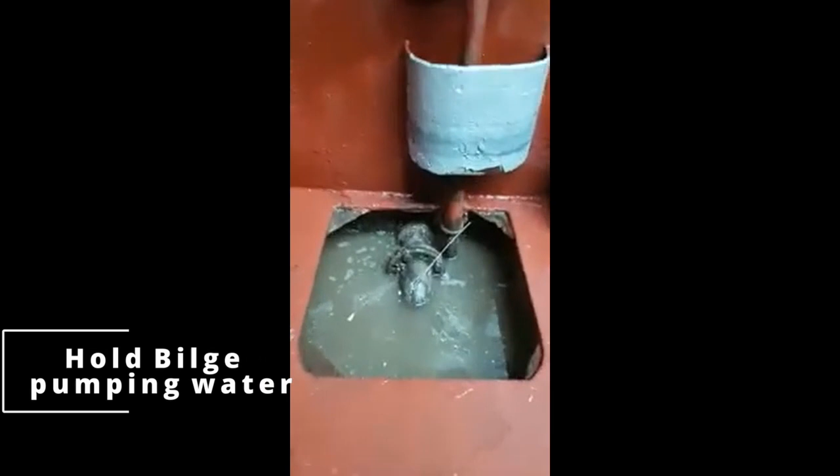So here comes the basic question. What is the function of cargo hold bilges? The only function of hold bilges is to gather all the drained water from the cargo that is loaded inside the cargo hold, and once the water is gathered, the hold bilge has the ability to pump out the water by stripping means.

Under what circumstances should you be using cargo hold bilges? First, to pump out wash water during the hold washing process, and second, to pump out water that is drained out while carrying cargo such as coal, sulfur, iron ore, etc.

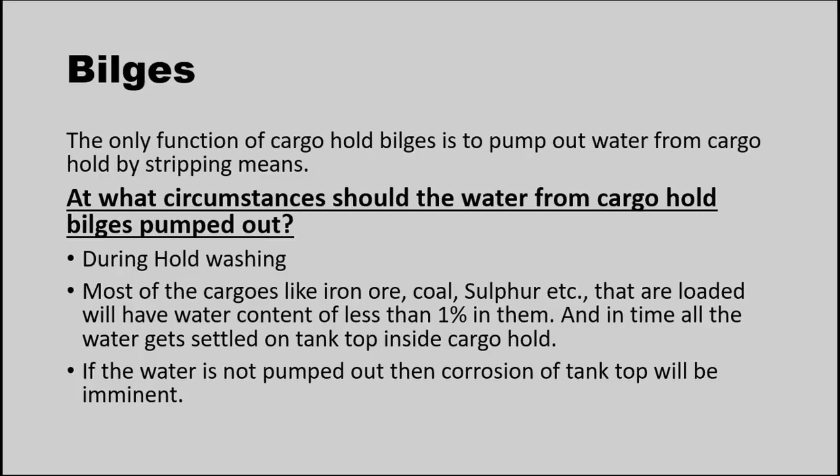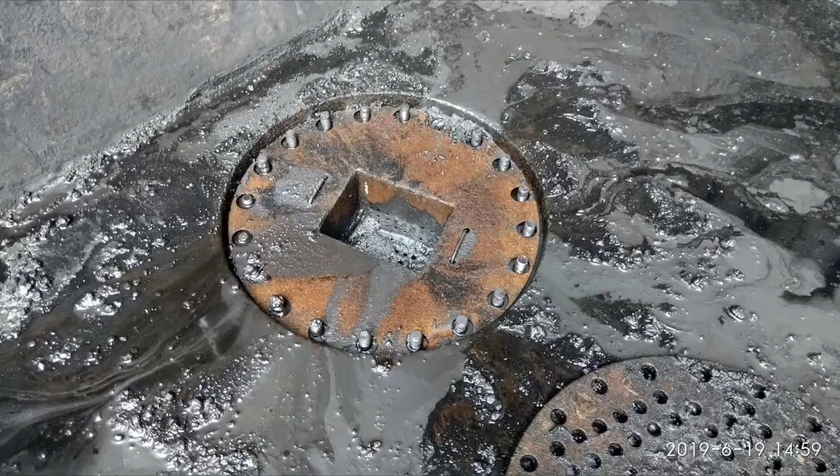So now let us discuss the structure of bilges. Bilges are nothing but a small compartment present in the aft of the cargo hold. They are located below the tank top. Bilges will be on both sides, port and starboard. These bilges will have a strainer plate. In these strainer plates, there will be some small perforations which help to drain water inside.

This strainer plate will be covered with a burlap prior to loading any cargo. Burlap is nothing but a jute bag. On top of the strainer plate, there will be a manhole cover. This manhole cover will not have any holes in it.

It is just a thick plate, and the purpose of this manhole cover is to protect the strainer plate from any damage which can occur due to the stress caused by the weight of the cargo or during cargo operations when they use payloaders. So in short, this manhole cover acts like a first line of defense for the strainer plate.

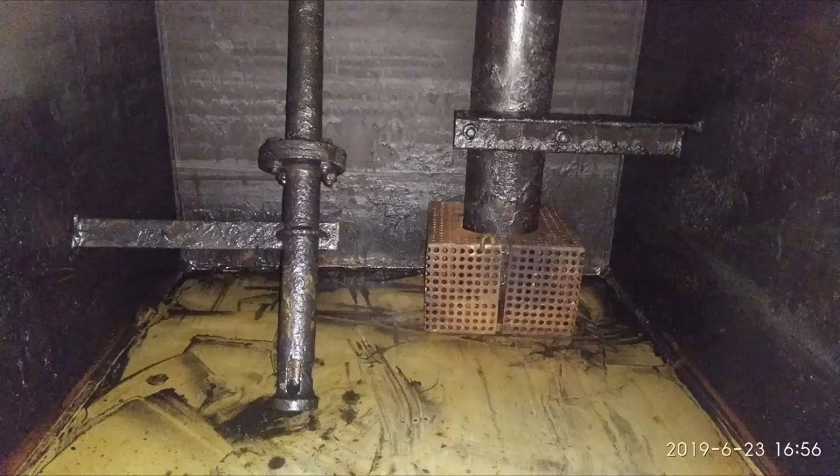Strum box. Strum box is also known as rose box. It is just a box which acts like a strainer. It prevents cargo residues from entering the bilge pipe. Each cargo hold bilge will have an individual sounding pipe. Through this sounding pipe, the water level of the bilge can be monitored. It is a standard practice to take soundings of these bilges daily.

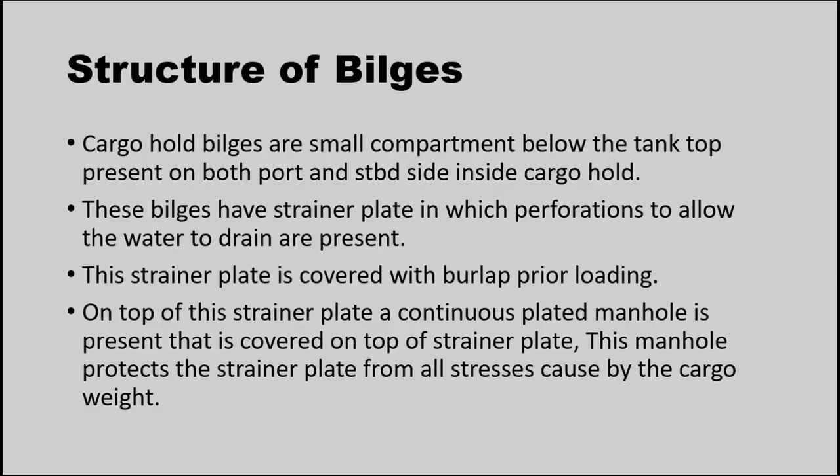Have you ever thought, what if suddenly the water level of the bilges starts to increase at night, causing the vessel to list towards a particular side? And obviously you can't tell a cadet to continuously monitor the bilge at night also. No, that's not possible. So that's why there are sensors fitted in the hold bilges.

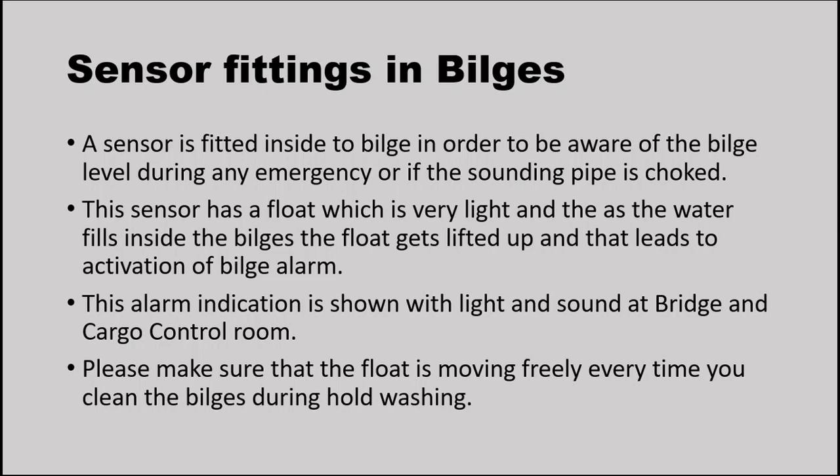These sensors will have a float which gets raised along with the water level inside the bilges. Once it is raised, an alarm will be sounded. This alarm indication will be shown as a flashing light and sound at the bridge and the cargo control room. So all these sensors come under the hold bilge monitoring system. Please make sure every time you grease the float and make sure that it is moving freely after sweeping of bilges.

How do bilges work? Cargo hold bilges pump out water from the hold using an eductor. I hope that you might have heard of an eductor. It is nothing but a system that can suck water by utilizing the Venturi effect.

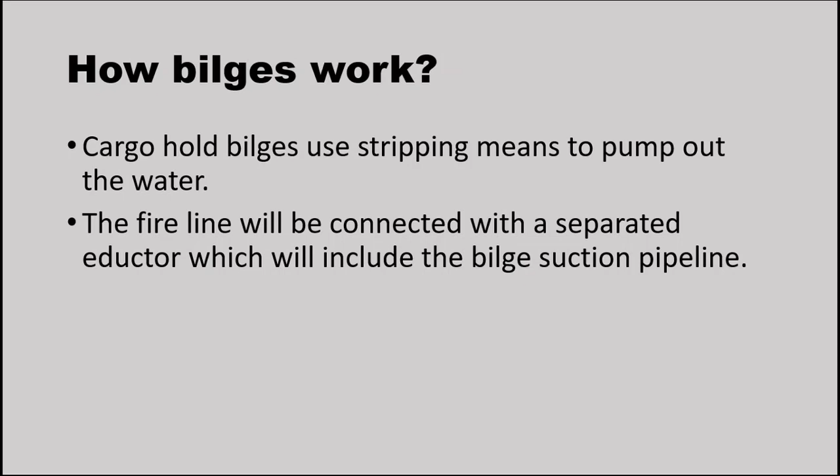Now comes the fun part. Many of you might have many questions about your cargo hold bilges, like how to increase the bilge suction pressure. If you partially close or throttle the anchor wash, then it will increase the fire line pressure, which automatically increases the bilge line pressure also. But keep in mind, it is not safe to completely close both the anchor washes. If you do so, always keep 1 or 2 fire hydrants on deck open.

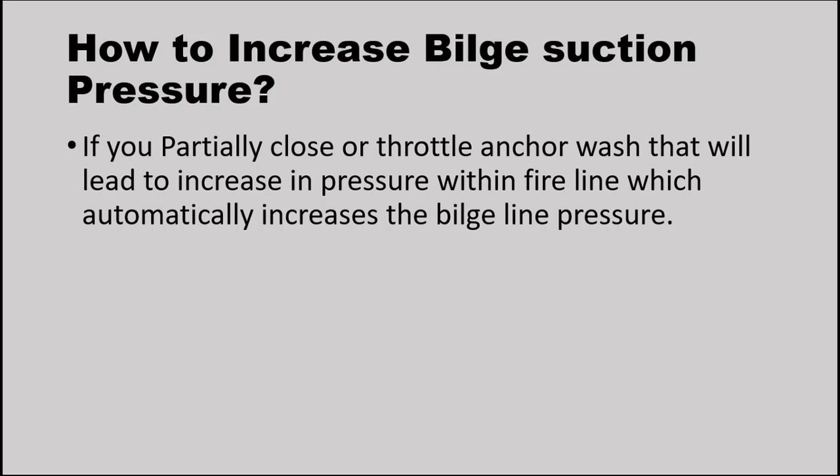If you completely close both the anchor washes and you did not open any fire hydrants, then the pressure in the fire line will be increased a lot. That might damage the fire line, causing it to crack at its weakest points.

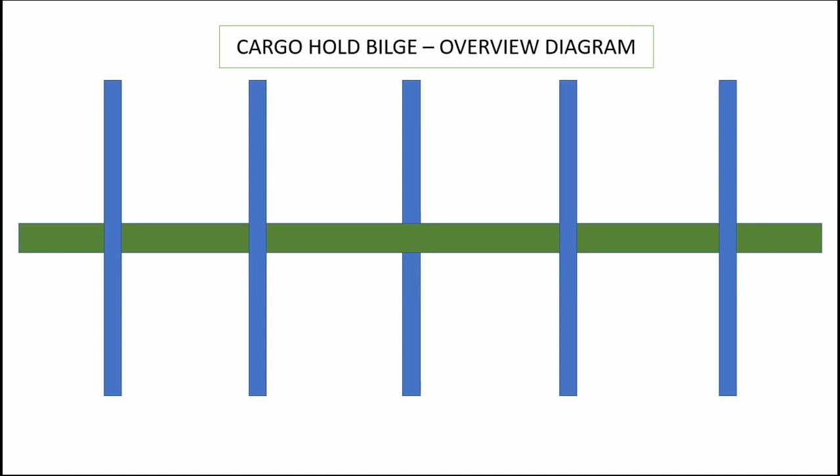Can we pump out cargo directly through the bilges instead of demucking and stuff? Because a lot of time will be saved if you do that. Trust me, it would be really easy if you do this, but if something chokes inside the bilge pipeline, then your entire bilge system will be screwed. Okay, now just think practically. Your bulk carrier vessel might be carrying a range of cargoes starting from ores, fertilizers to grain cargo, etc.

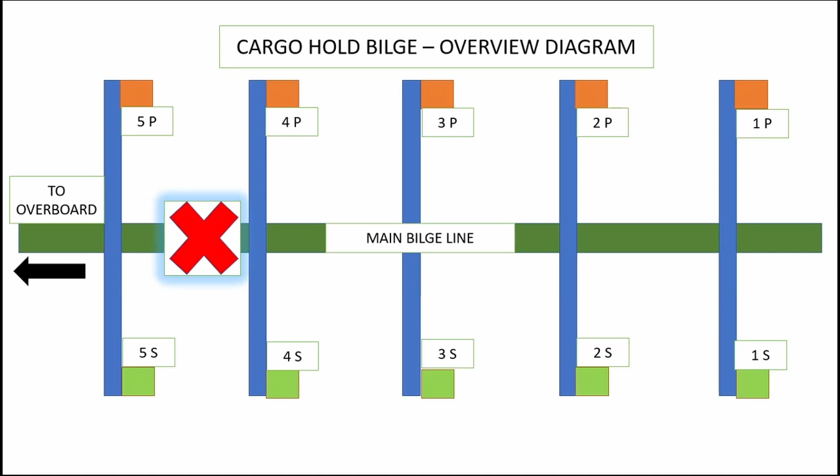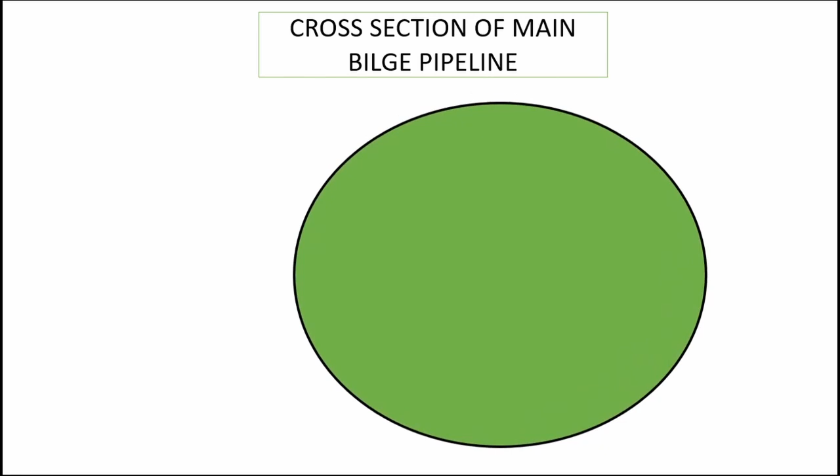So imagine first you are pumping grain cargo. Residues of grain cargo are present inside the pipeline now. On this, a layer of iron ore, which you will be pumping out next through the bilges, will also get settled in the pipeline. And later you will similarly pump out nickel ore, another layer. And a fourth layer, just imagine coal you are pumping out, so coal will also get settled. Just like that, again you will pump out cement, then cement will also get settled. So like this, layer after layer, they get settled inside the main bilge pipeline.

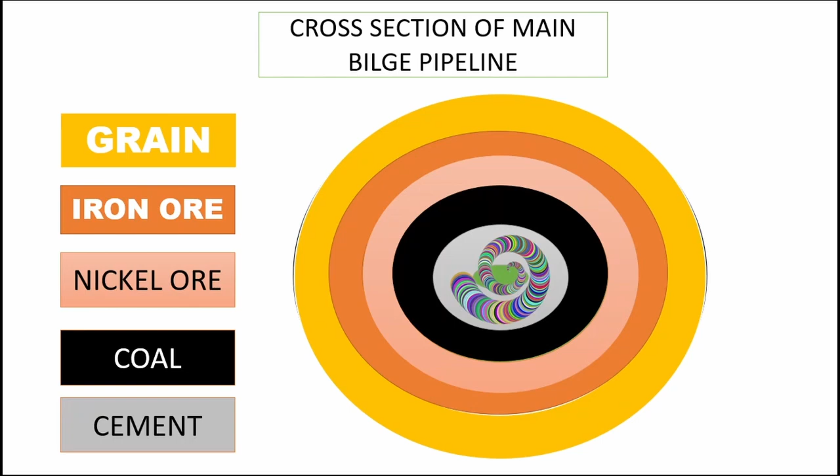And one fine day, when you again try to flush out the cargo through the hold bilges, the present cargo which you are trying to flush out will go and fill in the gap, and it will start choking the entire bilge pipeline. So if this choke happens, then your nightmare will start, because you must then clear the choke in the pipeline for the bilges to function properly. And these pipelines are present inside the duct keel, and you don't know the location of the choke either. So you must start removing the flanges of the bilge pipeline from one side, trying to clear the choke.

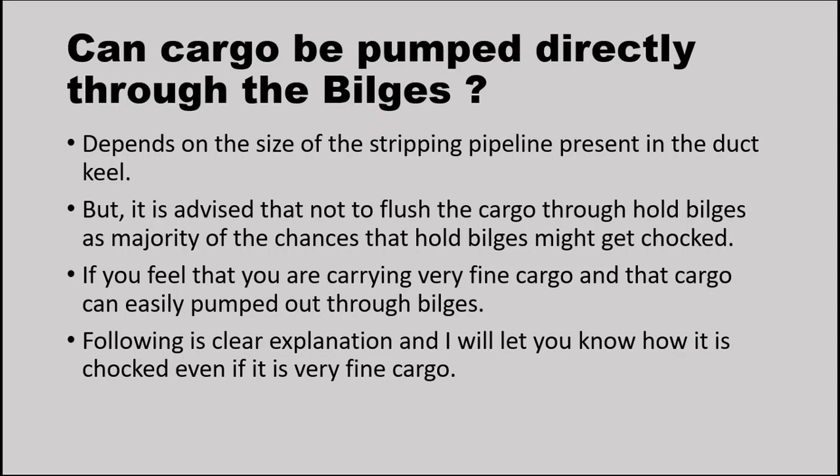Okay, now you might ask, what are the other alternatives instead of clearing the choke? Of course, for temporary purposes, you can pump out the bilge water or bilge cargo residues as much as possible through a Wilden pump or a submersible pump, which will be readily available on your ship. But their pumping rate will be very slow compared to the hold bilges, so it will take a lot of time.

Suppose only one side of the bilge is not pumping water and the other side is working well, then you're supposed to list your vessel to the other side. You can get your vessel listed by ballasting or deballasting any wing tank or heeling tank. So once your ship is listed to the other side, all the cargo and the water will flow to the other bilges, so you can use them.

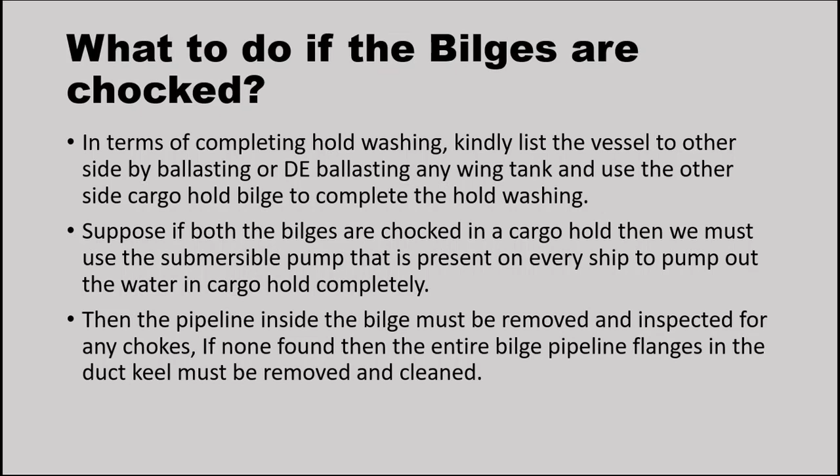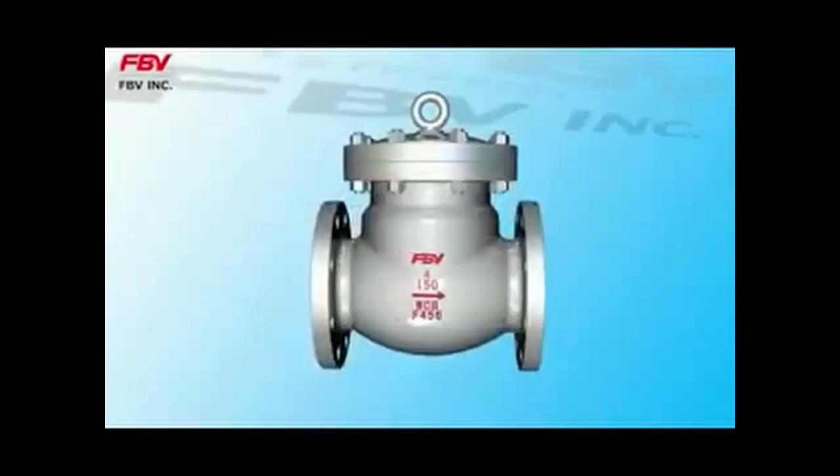Okay, many people will say that after the sweetening of bilges, when the bilges are fully clear and dry, after 2 to 3 days they once again check the hold bilges, but there is some water left below. So how does this water come? This phenomenon of water flowing back inside the bilges is known as backflow. Now we will be learning about backflow. Backflow is nothing but water in the bilge pipeline flowing back inside the hold bilges. This can be checked by performing a backflow test in every bilge.

It is a safe practice to perform a backflow test after every hold cleaning. The backflow test can tell you whether your non-return valve, NRV, is holding or not, because the sole purpose of the NRV in the bilge pipeline is to prevent backflow. If it fails, then we must remove the NRV to inspect it. You can usually find 2 faults in the NRV that can lead to backflow. First, some cargo particles will get stuck between the flaps and the valve seat, and second, the valve seat will be rusted a bit.

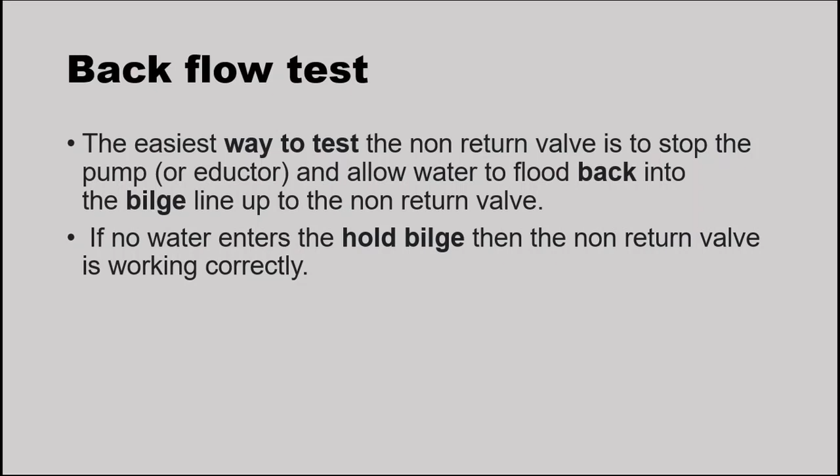In both cases, you are supposed to remove the NRV, check it, and if possible do a bit of lapping, apply a thin layer of grease on the valve seat, and then fit it back again. This ensures good watertight integrity.

Burlapping is nothing but applying a layer of jute cloth known as burlap on the strainer plate of the cargo hold. The purpose of doing this is that the perforations in the strainer plate are a little bit large, so many cargo particles can enter through the strainer plate. In order to prevent that, we apply a jute bag, which will allow only seepage of water inside the bilge.